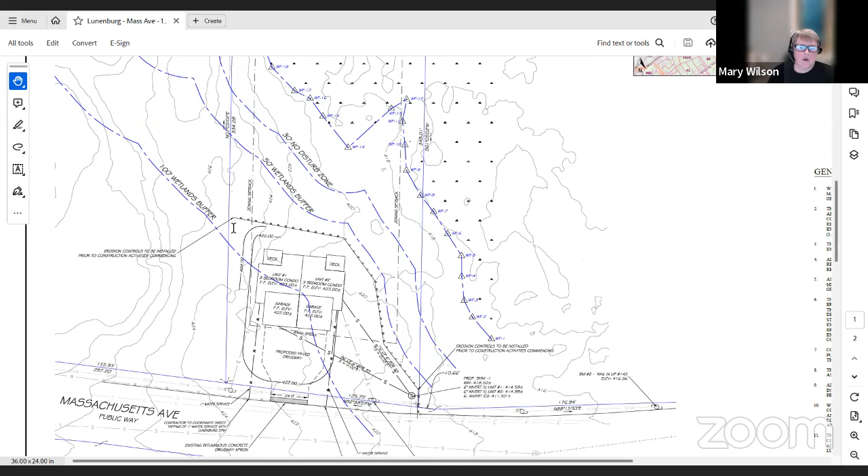Do I have questions or comments from other members of the commission? Okay, I'm not seeing any hands. Do we have any questions or comments from members of the public? And if people are struggling to find the raise your hand icon, you can always just unmute and let me know you have a comment, and I'll call on you. Okay, I'm not seeing any hands, and nobody's speaking up, so I don't have any other questions or concerns there. I'm open to accepting motions from the commission.

Madam Chair, I'd make a motion to approve this project with a standard order of conditions, and make sure that we receive a plan annotating that the limit of work is at the erosion protection, the erosion protection is survey located in place prior to the tree clearing, and the 2 white oaks are marked on the plan. And the hedge going in at least within the 100-foot buffer is marked on the plan as well. Very good, Rich. Thank you.

Do I have a second? Second by Jeff. Thank you, Jeff. Roll call vote. Chris, aye. Rich, aye. Jenny, aye. Jeff, aye. And I for myself.

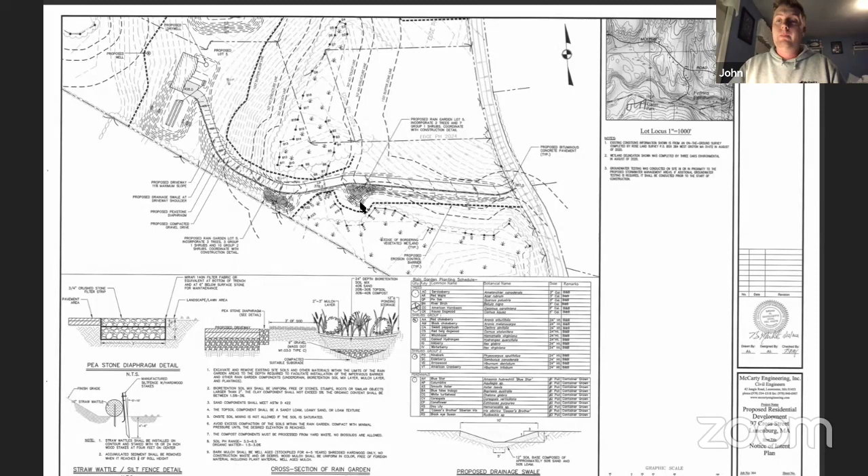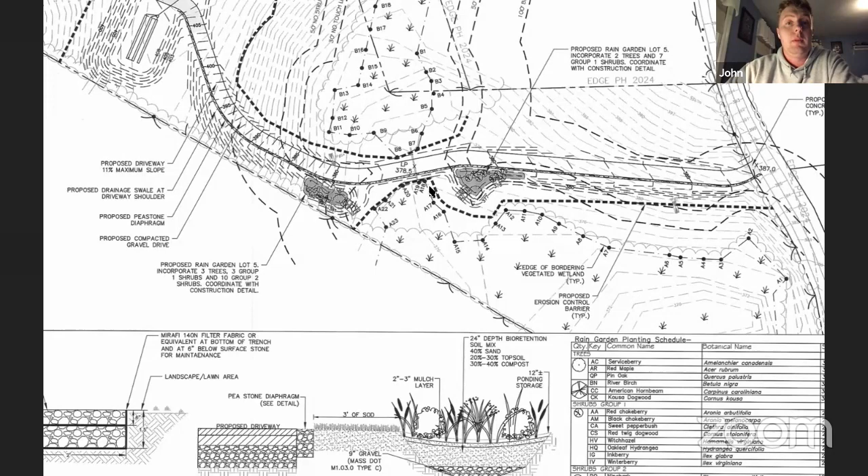Could you zoom in a little bit on this? So yeah, just kind of walk us through the driveway area and whatnot. Absolutely. So the only work in the buffer zone is the driveway itself. And you can see these shaded areas here, those are the rain gardens. And because of Lunenburg's local stormwater bylaw, we had to locate them here, and they're located within the 30-foot no touch. So we are requesting a waiver for that, but it's just a driveway to a single family residence.

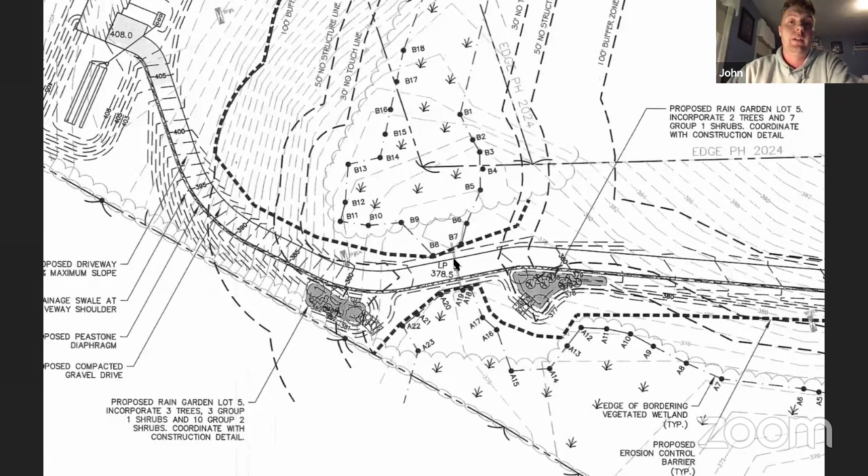This was previously a part of a 5-lot subdivision. This is the last lot. And the developer was trying to proceed with this last lot and discovered that his order of conditions had expired, and that's why we're here in front of you tonight. And so you're not actually having to do any fill into the wetland? No wetland fill. There's an existing culvert that we plan on utilizing here that connects the 2 wetland systems. This was originally a piece of farmland, so I think a farmer created that a while back. So no wetland fill. This is buffer work only.

Okay, I was reading the DEP comments. Sophie, have you had an opportunity to go out there, and do you have recommendations for us? Yeah, I was out there a little while ago. And the flags, are the flags still in there and in good condition? I did not recognize or pay attention to any flagging. There were no stakes or anything like that.

Sorry, I don't mean to cut you off, Sophie, but the erosion control barrier has been in for a couple of years now. So that's been put in place. I know Sophie mentioned she'd like to see a couple of spots replaced just because it deteriorated over time. But when we were on site, maybe about a month ago, erosion control barriers were in, and we actually did have the center line of the driveway staked out. So we didn't necessarily inspect flags, but you could really see the scope of the work that we're proposing.

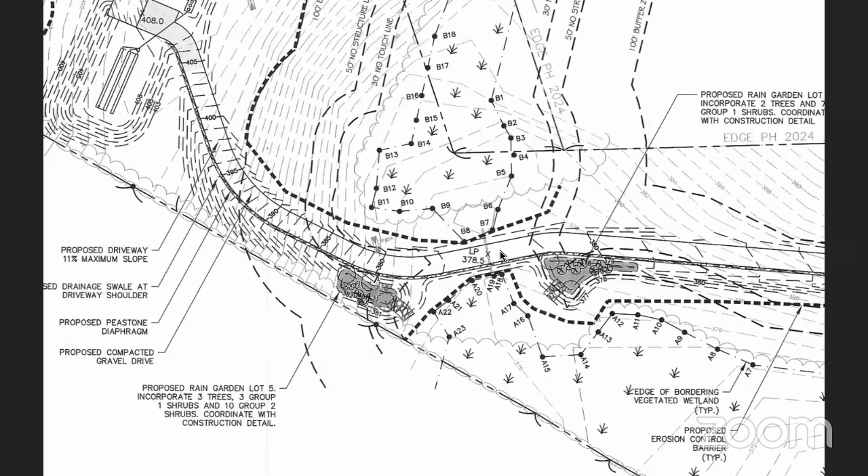Everybody's being shy tonight. Jeff, yes. Yeah, I think just a standard order of conditions with the limit of work to be the erosion control barrier. I can't see anything else that we would place on this personally. Okay. Thank you, Jeff.

Do we have any comments from members of the public? I'm not seeing any comments from members of the public. So I think I'm looking for a motion here. I'll make a motion, standard order of conditions, limit of work to be the erosion control. That's Jeff.

And Jeff, would it be acceptable within that we wait on issuing this NOI until our office gets a copy of the NHESP letter? Yes, that would be, we could add that. Sure. Thank you. Second. Thank you, Chris. Roll call vote. Jenny, aye. Rich, aye. Jeff, aye. Chris, aye.

And I for myself. Excuse me, Madam Chair, if I could just interject, before we close the public hearing, can we just clarify that the correspondence is not a letter from them per se, it's an email. I hope that's fine. Yeah, I think that's acceptable. Okay, all right, not a problem. I just wasn't sure if you were anticipating a letter. No, correspondence, okay, very good. I just want to make certain that we have something from them saying that they agree you can proceed. Okay, absolutely. Thank you. We'll move along.

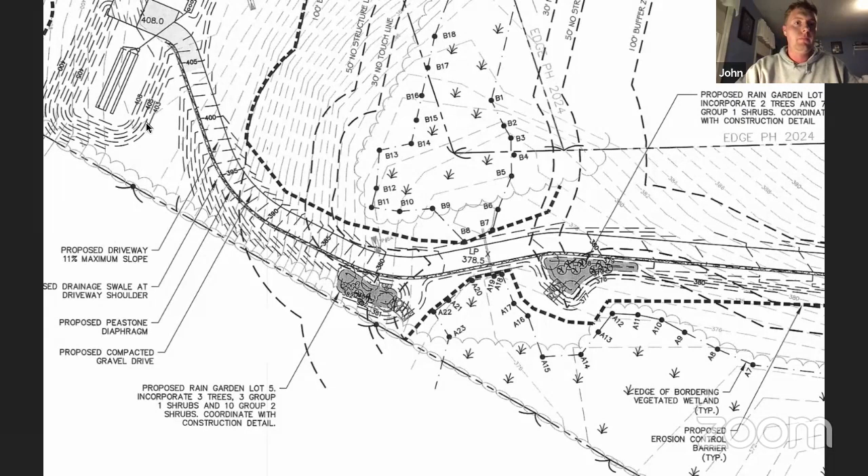Pursuant to Mass General Law, Chapter 131, Section 40 as amended, and the Town of Lunenburg Wetlands Protection and Municipal Bylaws, a public hearing for a notice of intent for the reconstruction of an existing rock revetment and landscape changes on the shore of Hickory Hills Lake at 154 Peninsula Drive. Do we have the applicant and or the representative here tonight? Madam Chair, Ryan Proctor with Dillis and Roy, representing the applicant. Hi, Ryan. Hello, how are you? Why don't you share your plans and give us an overview of the project? Absolutely. Let me just pull up the plan.

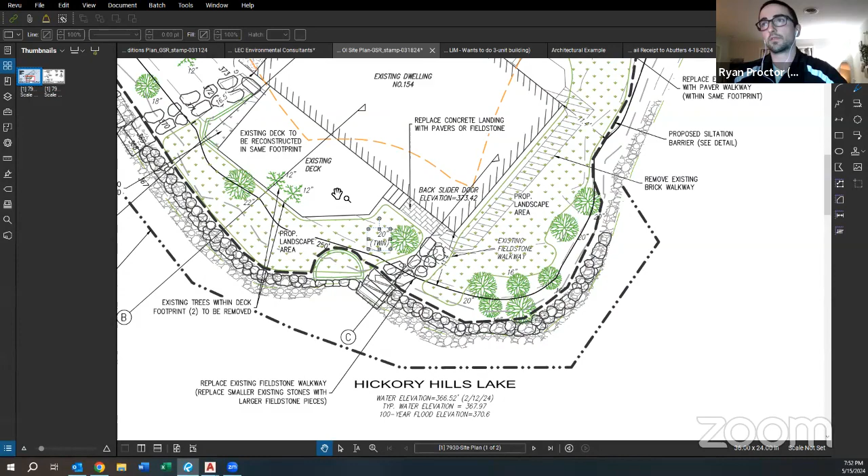But the total area is going to be the same there? Total area would be the same. The field stones would be separated, so there'd be a pretty significant void ratio between those pavers, just to help with infiltration in that area.

The existing deck on the side of the house is proposed to be reconstructed in the same footprint. It's currently timber, and it's showing some signs of failure, especially on the outside. So we're proposing to replace that within the same footprint. That'll be a standard deck. It'll be composite, but it'll have spacers in between so that there will be some infiltration of stormwater through the deck.

Along this frontage, we are proposing again to restore the existing land cover with a mixture of shrubs and perennials. And the deck currently has two 12-inch maple trees that are actually growing up through the decking. We are proposing to remove those, and those would be replaced because they're within the 30, consistent with your bylaw. There would be a total of 4 replacements for those trees.

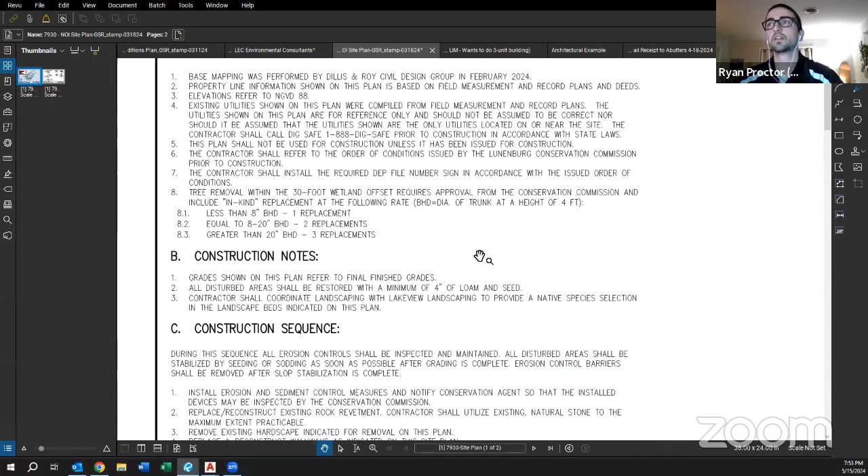And I do have a note on our site plan relative to that. So note 8 here is right out of your regulations. So there are two 12-inch trees. They require 2 replacements each. And those would be located in the 30 and part of the overall comprehensive landscape plan that Lakeview would put together.

The last thing on the left side of the house, there is currently another brick walkway that leads off a second portion of the deck and down to a seasonal dock. We are proposing to memorialize that walkway with fieldstones similar to what we've done here below. And that would lead down to an existing landing area near the seasonal dock.

The second portion of the project is along the shoreline. So the applicant is proposing to reconstruct the revetment along approximately 125 linear feet of shoreline. Basically, that would pull back the revetment such that it's recessed into the slope. We'd be holding the upper bank elevation and then creating a dry stacked vertical retaining wall with a filter fabric behind to prevent some migration of sediment that's currently happening now and washing out into the water.

We would have erosion protection on the top of that wall, as well as a poly barrier in the water to prevent any migration of sediment down into the lake. Since these shoreline improvements exceed the 50 linear feet along the shoreline, the Wetland Protection Act requires us to do a wildlife habitat evaluation. So the applicant did contact Dan Wells of LEC Environmental to perform that evaluation, and I did submit a copy of that to your commission with all of our materials. It's a little over 40 pages.

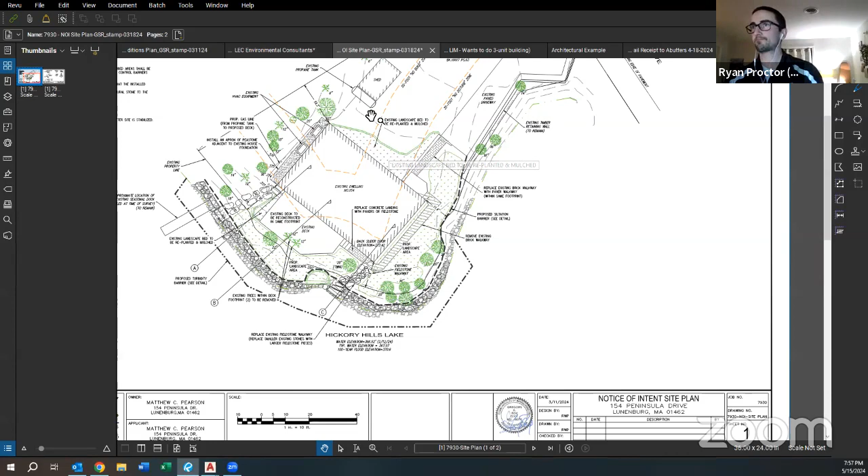Did you say where the replacement trees were going to go? I did not. That was going to be worked out with Lakeview. We do have some spots along the east side of the house that I think would be appropriate. They would definitely be within the 30. That's where all the landscape improvements are happening. I don't have specific locations for them at this time.

Okay, and so I take it that we don't have the landscape proposal from Lakeview? Not specifically. Mark just mentioned that all the species he'd be picking would be consistent with other projects in town. They would be native, like other lakeshore projects he's done on the lakes here.

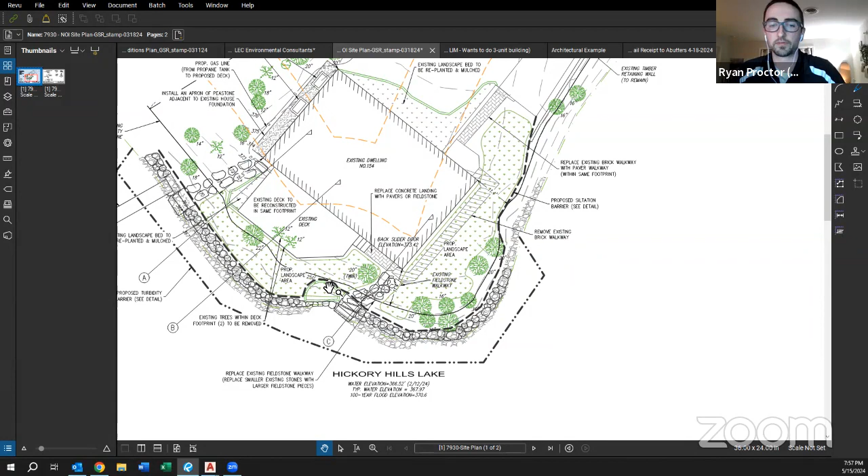Rich. Madam Chair, as the applicant is working with my brother, I'm going to recuse myself from this hearing. Thank you, Rich.

Jeff. Yeah, Madam Chair, just a question or a comment more. With lake levels rising fast on lakes, it seems that some of these projects are being started in the fall and the lake rises and they're in the water. I think we really need to start to put some restrictions on lake level and maybe like a weekly report of the water levels while projects like this are occurring, just for our records.

Where would we get that information from? Is there some automated way to get it? Well, even just from a contractor, just to say the lake's at an operationally feasible level to proceed with the project currently, if we can just get a weekly report. Because just for example, this year, I know Lake Shirley and Hickory Hills were pretty much filled to capacity the first week in January, which is kind of the time that a lot of these projects occur. And this is a fairly extensive one. I would assume it would take close to a month.

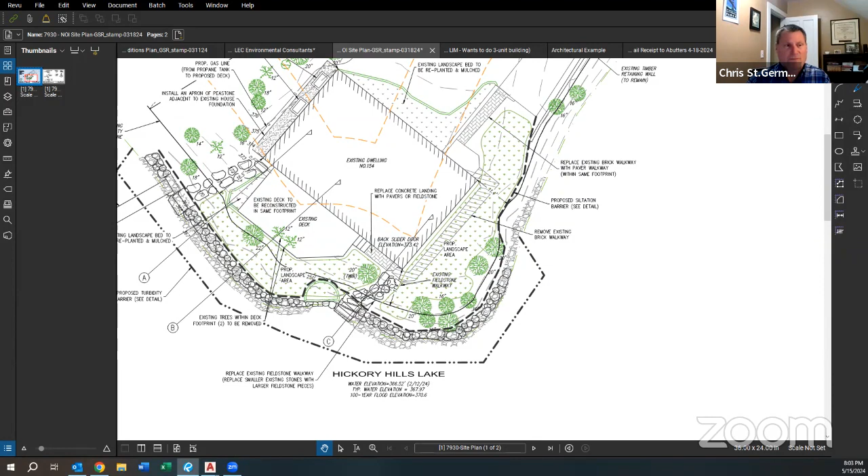Do we have any motions? So moved. So Chris, you're okay with those conditions that I recommended? Yes. Okay. Do we have a second? Second. Okay, thank you, Jenny. So we'll go for a roll call vote.

Chris St. Germain, aye. Jeff Viviano, aye. Rich Bursch has recused himself. Jenny, aye. And aye for myself. I appreciate it and have a good night. Thank you, Ryan. Thank you.

Pursuant to Mass General Law, Chapter 131, Section 40, as amended, and the Town of Lunenburg Wetlands Protection and Municipal Bylaws, a public hearing for a notice of intent by Timothy K. Gendron and the Revocable Trust. The project proposal is for construction of a residence duplex, associated driveway, and drainage features. The location is within the edges of bordering vegetated wetland and buffer of an intermittent stream at Lot 2 Cross Road, Parcel 99-11.

And do we have the applicant and or their representatives here tonight? Yes, ma'am. You have Chris Anderson with Hannigan Engineering. Okay, Chris, you want to give us an overview of the project? Sure. Yep. So if I could just share my screen real quick, I can pull up the plan. Please do.

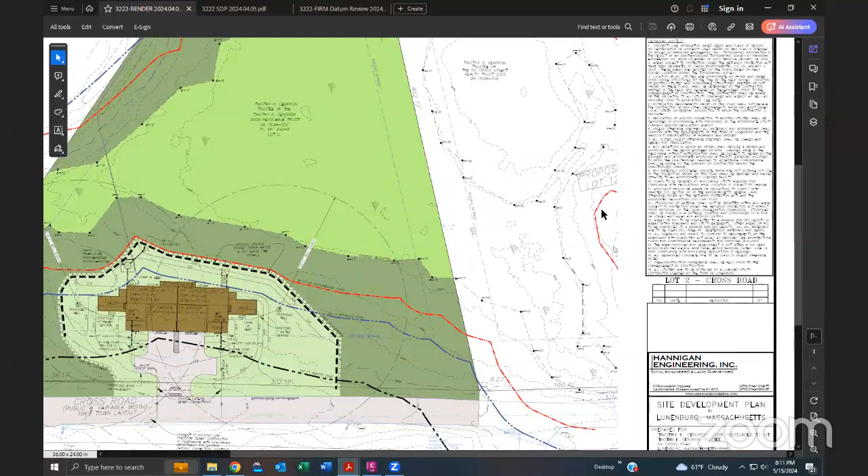And I'm looking at your plan. Where you have erosion control, you have a note that that's the limit of clearing. So it doesn't say it's a limit of work. Is there a note here about the limit of work? It was the intent that that would be it, but we can add additional notations on the plan, clearly memorializing that the erosion control line is the limit of clearing and limit of disturbance in perpetuity. And am I understanding too that the proposal is to cut all of the trees contained within the limit of clearing? It is the intent to do that at this point in time. Okay.

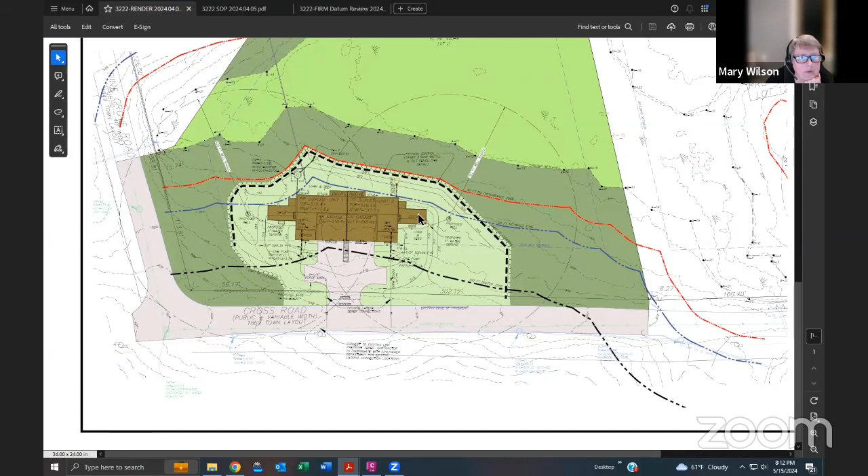Sophie, what are your recommendations? Well, first, if you don't mind, I have some clarifying questions. Sure. Quite a few actually. So I reviewed the FIRM datum letter on the bordering land subject to flooding, and I want to ask. It states that there isn't any located on the property, based on the NAVD 88 datum for 512.90 feet in elevation, but I was looking at the plan pretty extensively, and it appears to me, if I'm interpreting it correctly, that the work would be done within the 512.90 to 506 foot elevation grade. And if I'm interpreting that right, that would be considered within the BLSF.

So through the chair, if you don't mind. Yes, Chris, please respond. So it is correct that the elevations of the actual site themselves would be, quote unquote, below the 512.9 number, if you will. But what happens is when you look at the topographic information along Lake Whalom itself, there's a naturally occurring berm that sits around the 513 to 514 mark along the entire perimeter of the pond. So that creates a physical barrier from floodwater from Lake Whalom entering into this area of the site.

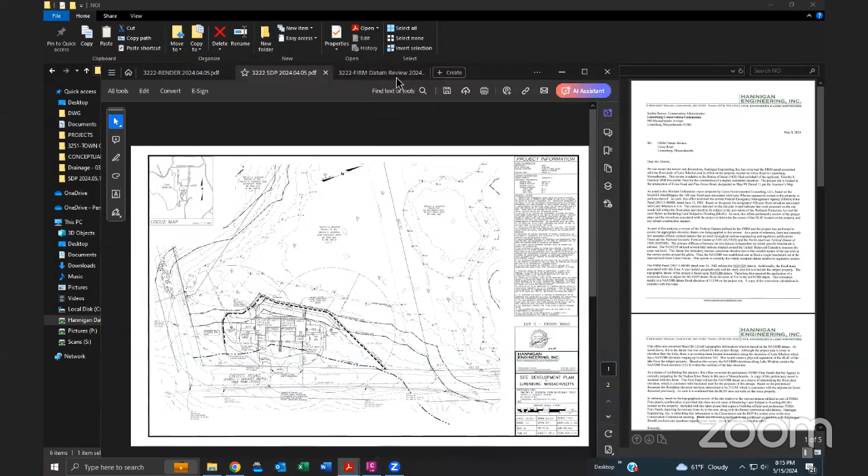So as a quote unquote gut check, we looked at the preliminary FEMA FIRM panels that are currently being reviewed and hopefully will be issued in the coming months. But effectively what that does is it re-reviews the floodplain within these areas. Obviously, this is preliminary and still has to go through the vetting process. But FEMA, when they do finally issue these documents, limits the Zone A to the 512.9, which coincided with our calculation for the datum shift.

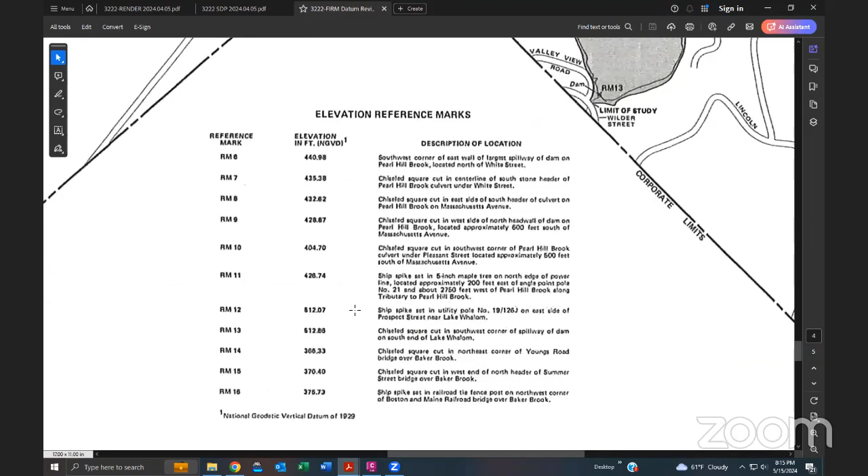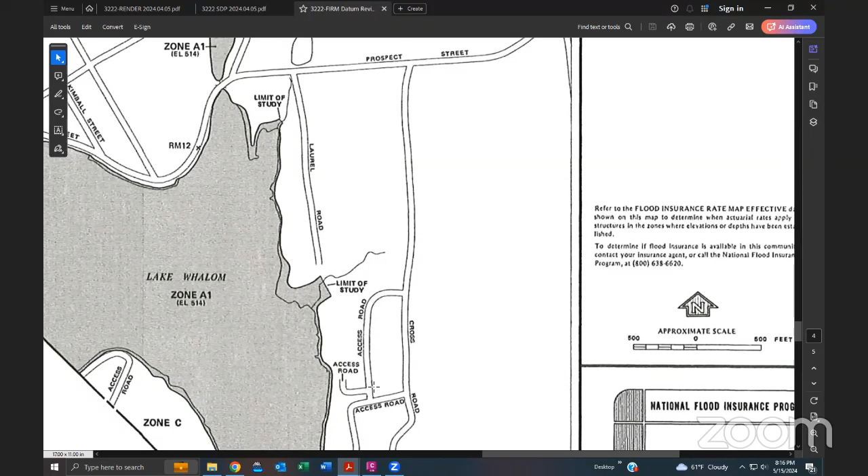And when you look at the actual current legal FIRM panel, back when they first created this FEMA FIRM, they effectively said, we don't want to study any further, and this is the limit of the study. So that put the burden on us to do the analysis that we did perform, and that's how we came up with the determination that the lake's berm in that area of the limited study contains the floodplain within the lake itself. Chris, where is that berm approximately on the drawing that you're showing us?

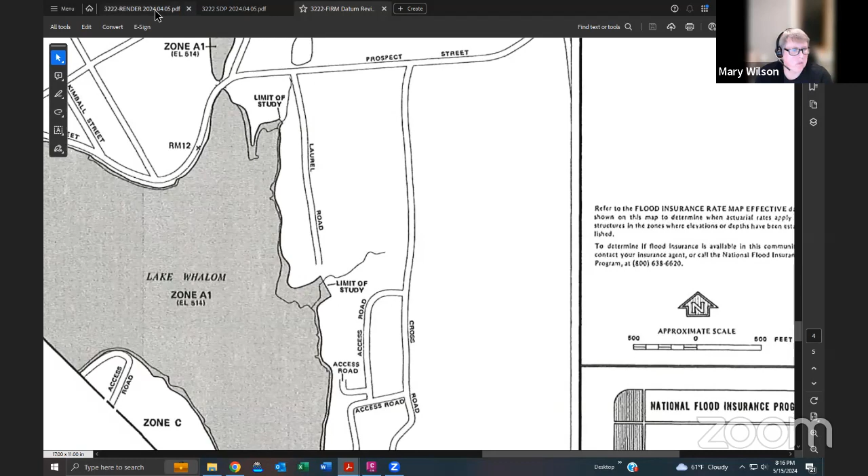So it is located well off the property. If you look at our locus plan, here's the locus, the property that's in question. That berm is actually located through here. And we used LiDAR information of the area to determine where that berm elevation is and where it's located. Okay, thank you, Chris. Sophie, back to you. Yep.

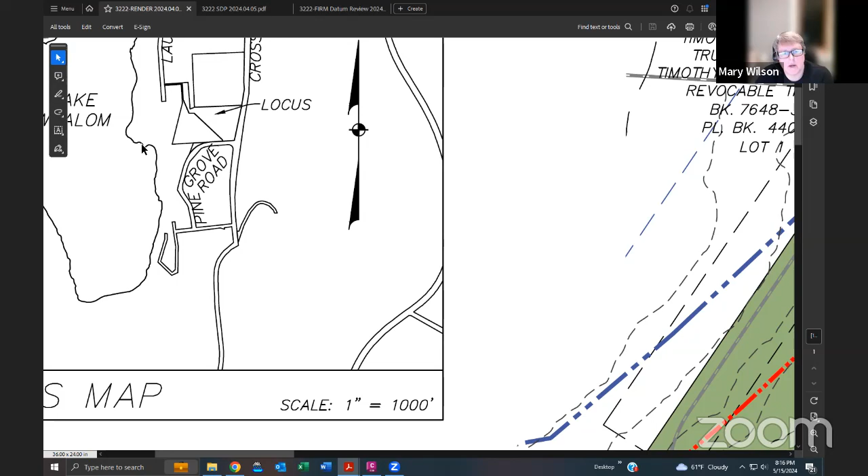Okay, Mary, you asked the next question that I had on location of the berm. So from my understanding, that would possibly stop the water from coming in that direction. But since the wetland has about 3 hydrologic connections, one of which goes directly into flowing out of Lake Whalom, would that pose any sort of changes in the water level there?

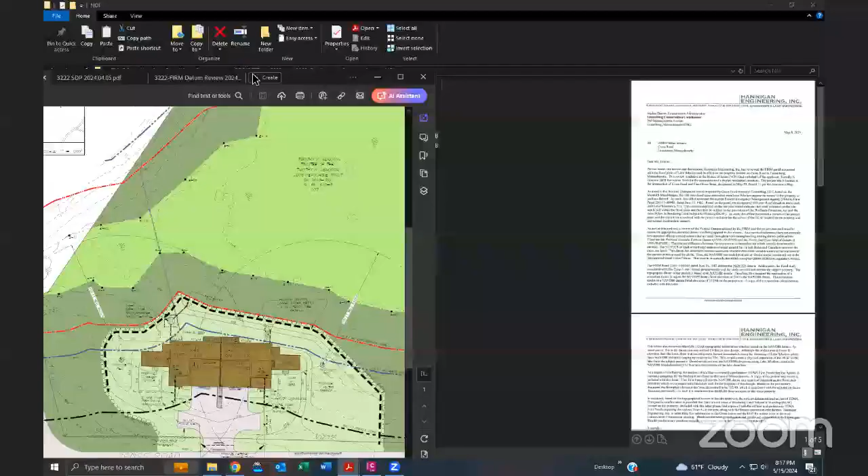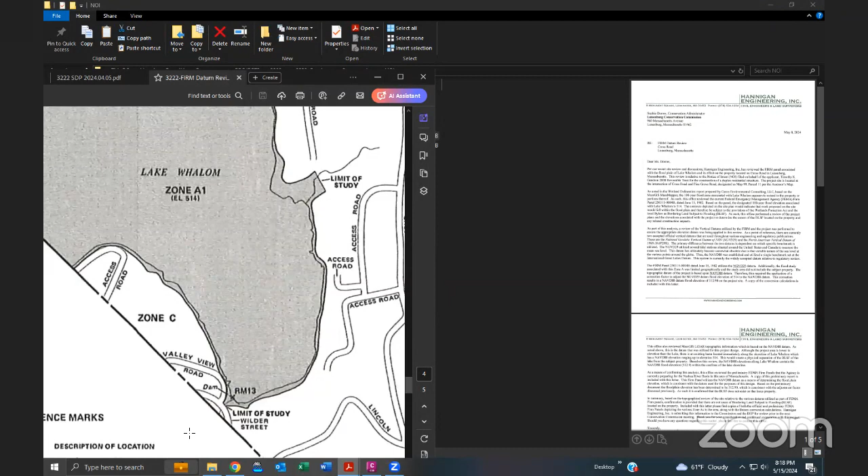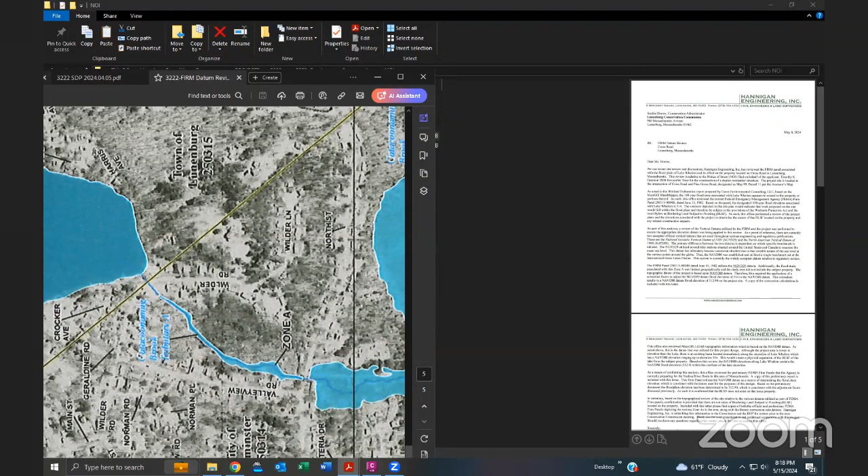So my understanding is that Lake Whalom discharges down near Valley View Road and Wilder Street. So the water generally flows from the northerly portion of the site, through Lake Whalom and out through that dam structure where it says RM13. And when we look at the preliminary FEMA FIRM, it reflects a similar path of water flow. Okay. Sophie, any other questions?

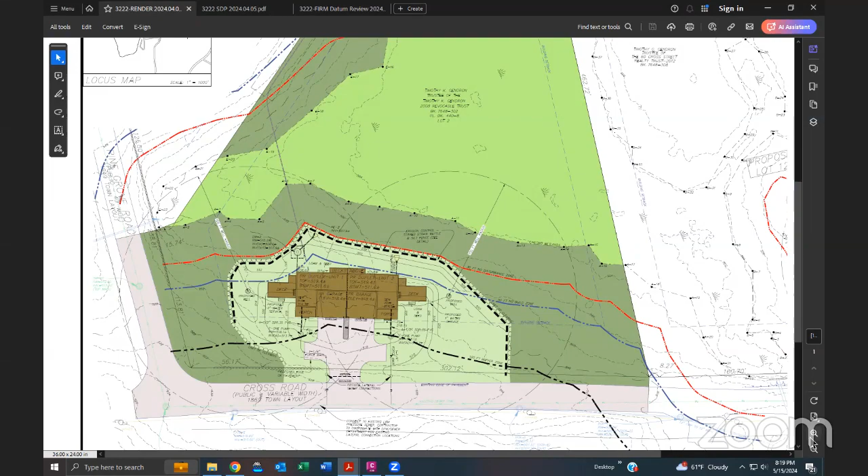Hey, yes, actually, there were 2, it looks like foundation drains, it's kind of small, on the north or backside of the proposed building. Yep, foundation drain. And the other structure off to the left, it's a box with the round depiction there. Are there any alternative locations for them? Can they be moved closer to the 50-foot no build, since they are a structure and could possibly be impervious surface? We don't have a detail on that either.

So the foundation drain is dictated exclusively by how to get the water away from the footing of the foundation. So that one's kind of stuck. All it is is a perforated pipe around the footing of the foundation that discharges groundwater. If it does ever reach that point, getting it away from the site is dictated by gravity.

The dry well and the other structure right here is considered the dry well system for the roof drainage. The intent and purpose of putting the dry well in this location was so that we could capture and disconnect the impervious area from the roof from directly discharging into the jurisdictional areas. So that one's also dictated by topography and hydrology in order to get that disconnect to occur. Otherwise, it would have to be piped all around the building in order to get it away from that area.

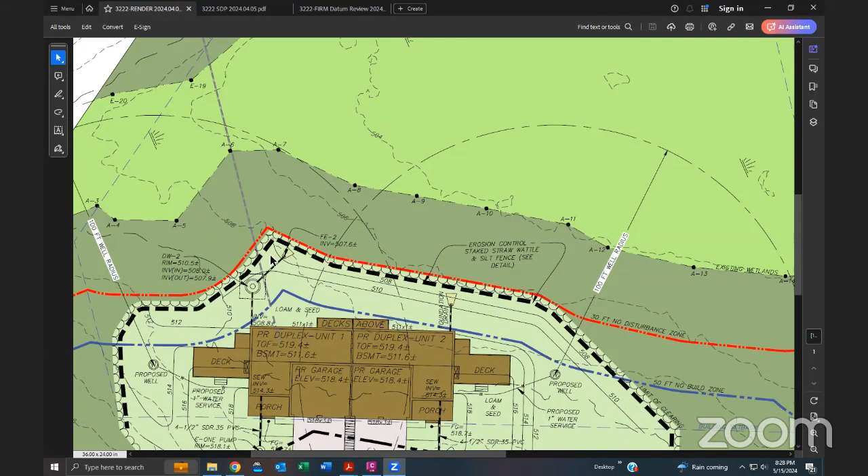Okay. Yeah, I guess my concern was with the delineation itself. Just in looking at it quickly, flags 6, 7 and 8 don't seem to be following the far side of the wetland as far as the elevation. On the far side, they seem to be up at 506, E19, E18, E17. But then the corresponding A6, A7, A8 are below the 506 elevations. I was just questioning. I might try to get out there this week and take a look, since we can't close it anyways. But I wasn't sure if Sophie had checked on the delineation.

Sophie, can you respond to Rich's question as well? I think you had your hand up. Yeah, I just wanted to echo Jenny's, and I wanted to say that yes, I do believe that the majority of that site that I was walking around did seem a lot tighter between the buffer and the actual roadside itself. And I do think the delineation is questionable. So I would definitely back myself and other commissioners going out there again to have a closer look at the flagging. Because the whole site for me is concerning.

Through the chair, if it makes sense, I can reach out to Chuck Caron with Caron Environmental. He did the delineation on the site. I think it might make sense to have Chuck, any of the commission members who want to be on site at the time, and Sophie, and have him walk through the delineation line and show how it was determined. That way there's no question of why the line is doing what the line is doing, if you will. Yeah, I think that's a great idea.

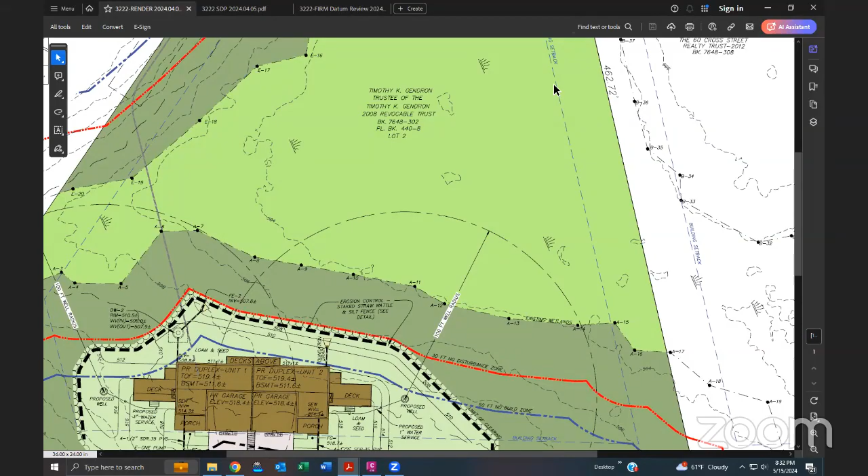Okay. So I'm looking for a motion by the commission to continue to June 5th. So moved, Rich. Second, Chris. Great, thank you. Roll call vote. Jenny, aye. Jeff, aye. Rich, aye. Chris, aye. And I for myself, continuing to June 5th.

Okay, moving along. Pursuant to Mass General Law, Chapter 131, Section 40 as amended, and the Town of Lunenburg Wetlands Protection and Municipal Bylaws, a public hearing for a request for determination for PJ Keating Company. The project proposal is for replacement and maintenance work connected to the existing pump house. The location is within 100 feet of a bordering vegetated wetland and priority habitat number 1738, related to 495 Leominster Shirley Road. Do we have a representative from the Keating Company here tonight? Yes, we have a couple. I'm Jacob Bremer, Assistant Environmental Compliance Manager at PJ Keating. And we also have Cody Delaney and Rob Pagan.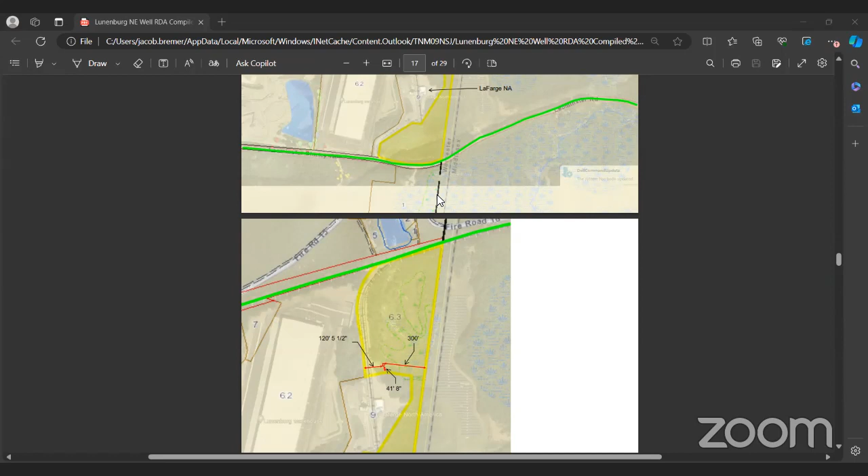A quick description of the work: PJ Keating Company proposes to excavate a 4-foot deep footing, 42.5 feet in length, to create a 12 by 18-foot foundation. We will be pouring a concrete slab, 12 feet in width, 18.5 feet in length, and 6 inches deep inside that excavation, and erecting a wood shed on top of the slab. This project represents a replacement of an existing well. The replacement well has been approved by Mass DEP, and I will show you a quick plan.

So here, this brown rectangle is the existing well. So we would like to just extend, create a new lean-to right next to it. This wetland area, I believe it's actually fenced off or not easy to access, but we will be going nowhere near it, just in this general area. And the access road to it kind of comes up along on the far side of the wetland.

Oh, and I'll scroll down and show some photos that we have of the wetland. I believe they're in here. That might not be. Okay. Maybe I went too far.

One other thing that we wanted to bring up was to identify provisions of the Wetland Protection Act or regulations which may exempt the applicant from having to file a notice of intent for all or part of the described work. So, per the Massachusetts Wetlands Protection Act, we request that the commission consider the following: 310 CMR 10.02.2A2, activities conducted to maintain, repair, or replace, but not substantially change or enlarge an existing and lawfully located structure or facility used in the service of the public and used to provide electric, gas, water, sewer, telephone, telegraph, and other communication services, provided said work utilizes the best practical measures to avoid or minimize impacts to wetland resource areas outside the footprint of said structure or facility.

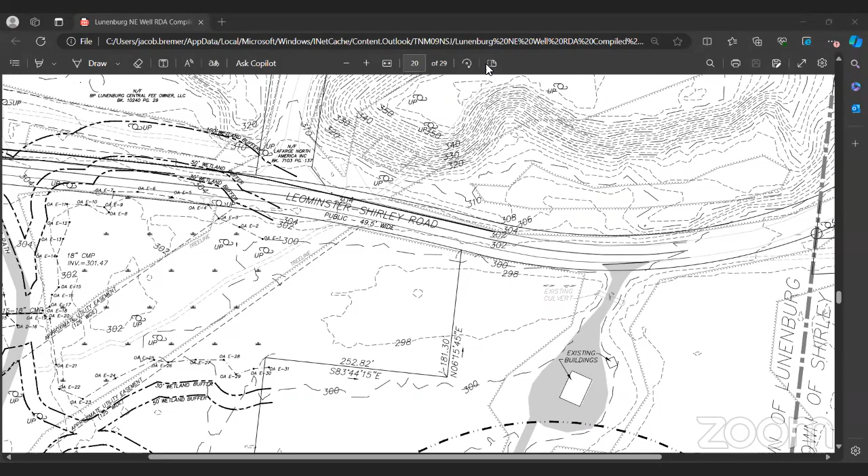Oh yeah, no problem. So like I said before, I'm gonna stop sharing my screen now. We do have DEP approval already. And we are looking for the commission's approval, I believe. It's an RDA. What do you have DEP approval for? It's typically only the NOIs, is what I'm familiar with, getting DEP approval.

Cody, you have your hand raised? Excuse me, I just haven't lowered it yet. Sorry about that. Oh, yeah, okay, no issues. A lot of times I lower them for people too, but not quite on my game tonight, but that's okay.

To answer your question, we have DEP approval to replace the well. Okay. On the well replacement. Okay, and again, you're increasing the cement pad there by how much? I was just scanning through your application to see if that was clear to me. Yes, we'll be pouring a concrete slab, 12 feet in width, 18.5 feet in length, and 6 inches deep.

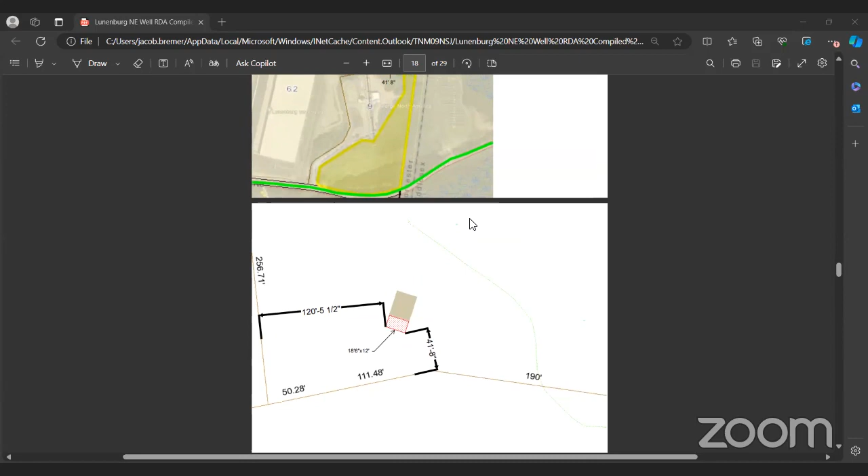Okay, yeah, I can see that green. I can see that on your screen, but I don't actually see that in the submittal. I see something similar in the submittal, but I don't see that unless I'm overlooking it. I think it didn't print very well. I'm looking at this printed submittal too. You can't see the line at all. I see what you mean.

So I think I would like to see, as Rich was pointing out, where the wetland is relative to the work that's being done, and the dimensioning on there so that we know exactly what is where relative to the wetland, and a thick line so that we can see it. And Rich, it was your turn to speak, so I'll go back to you.

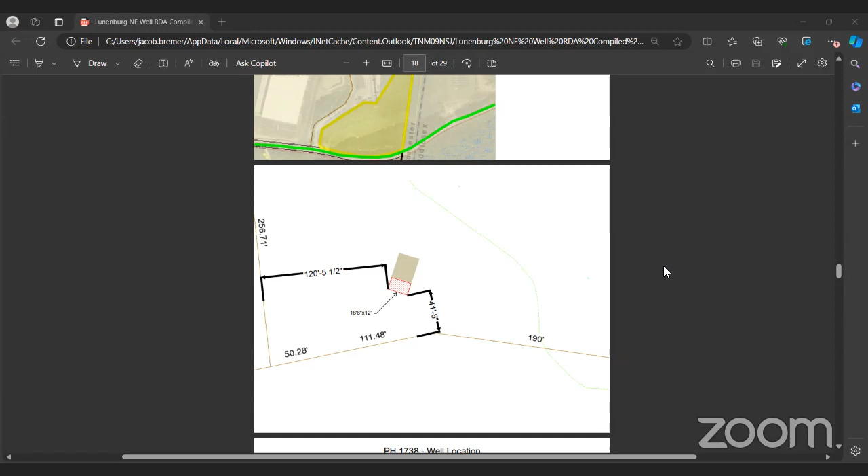Yeah, unfortunately, at this point, without having an actual site plan of where we are in relationship to the wetlands and access roads and things like that, I'm not prepared to make any more decisions on whether we need an RDA or an NOI. Well, I pointed out earlier that the access road begins here and comes along here and sticks to the left side. We can't see that in the drawing. I mean, it's not apparent to me in the drawing anyway.

Yeah, and unfortunately, there's no erosion protection. Unfortunately, it's an incomplete application at this point, even for an NOI or an RDA. So if they would come back with a drawing that actually shows where the existing structures are, where the new structure would be, the dimensions from the wetland line, and including the access road, would that put us on a plan to make a determination? Is there anything else that you would be looking for? I mean, just the standard information that we ask for in an RDA, you know.

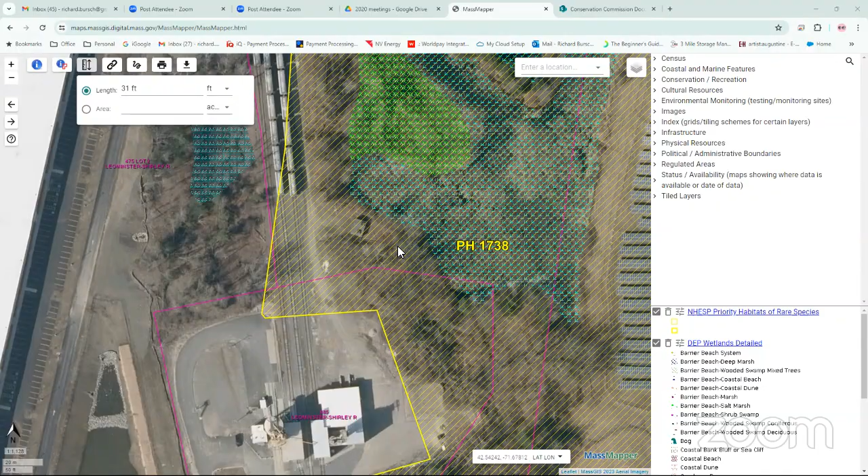Okay, so I think I'm looking for a motion to continue this to the next meeting, which is June 5th. So moved. Rich Bird. Thank you, Rich. Second. Second, thank you, Jenny. Roll call vote. Jeff? Aye. Jenny, aye. Rich? All right. Chris? Aye. And aye for myself. Thank you, gentlemen. Thank you very much. Thank you.

We will move along. Okay, so Howard Street is the next one on the agenda. We already cleared that through a continuation request. The following one is 255 Sunny Hill Road. And I guess I'm gonna read the whole script. Pursuant to Mass General Law, Chapter 131, section 40 as amended, and the town of Lunenburg Wetlands Protection and Municipal Bylaws. A public hearing on a notice of intent by Stephanie McSweeney for the construction of a single-family home and associated site work at 255 Sunny Hill Road, DEP number 2081320.

Do we have Mr. McSweeney or his representative on the call here tonight? Yep, John Plifka again here from McCarty Engineering. Hi, John. Yeah, so I think if I recall correctly, you are back because in our last deliberation and determination for the third party wetlands review, we kind of got the name of the consultant firm and the cost misaligned. Is that right? Yeah, sorry, I didn't mean to cut you off. That is correct. We had the right dollar amount, but the wrong company.

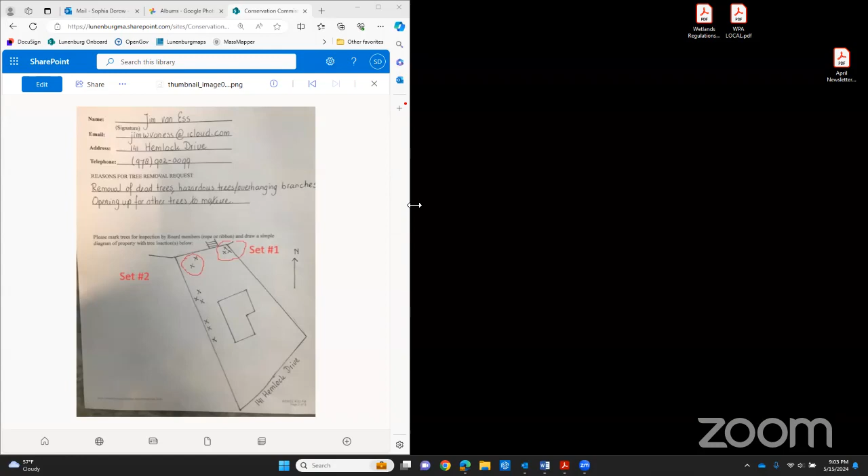I know it looks kind of wonky with a million different tabs and stuff, but this is reference to what the Hickory Hills Association has provided. Basically, the circles are showing the trees that were proposed for removal.

Please mark trees. No, Sophia, these were actually the ones that we left, remember? The circled ones were the ones that they came back to me at, and they say, yeah, leave these alone, which is what we did. Only on set number 1, we took off some of the branches. Remember that I showed you these? No, yes. Okay.

So in short, I believe the number of total removed trees were, I believe, 5. You can correct me if that sounds... Yeah, correct. That's about right. And the 2 biggest ones were the ones on the side of the house. These were the oak tree that was completely hollow on the inside, and then the one next to it was completely hanging over the house.

So the 3 stars that you see on the left side of the house, these actually were the ones that we did not remove. We just took some branches off that were hanging over the house, but they are still there. These 3, yes. And out of the other 3, 2 of these were taken down. One was the one that was completely hollow, an oak tree. And then there was another oak tree, the one most to the right side, that was hanging over the house completely, and that one was taken down.

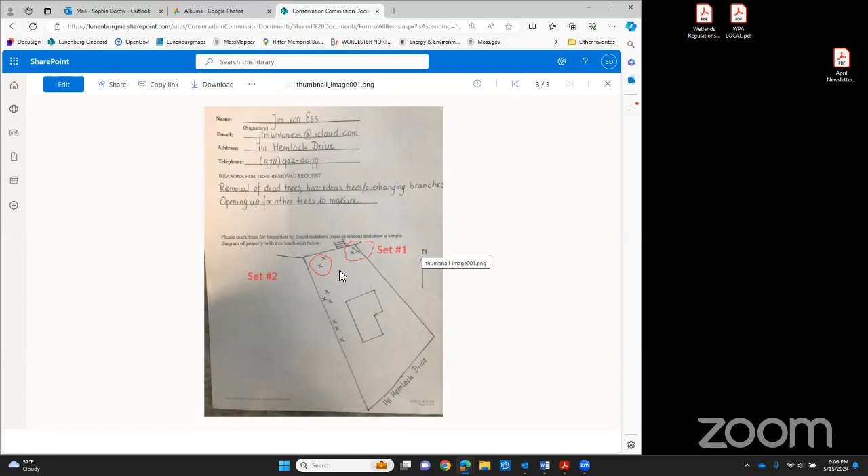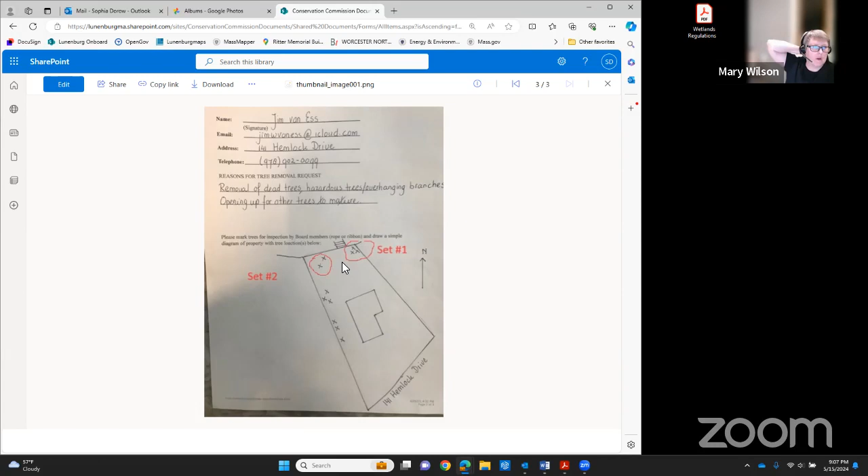Okay, thank you. Anything else you wanted to add, Sophie? No, I'll just back him up on, they do look pretty healthy for the time being as new saplings. Okay. Thank you, Sophie. Jenny, anything you wanted to add?

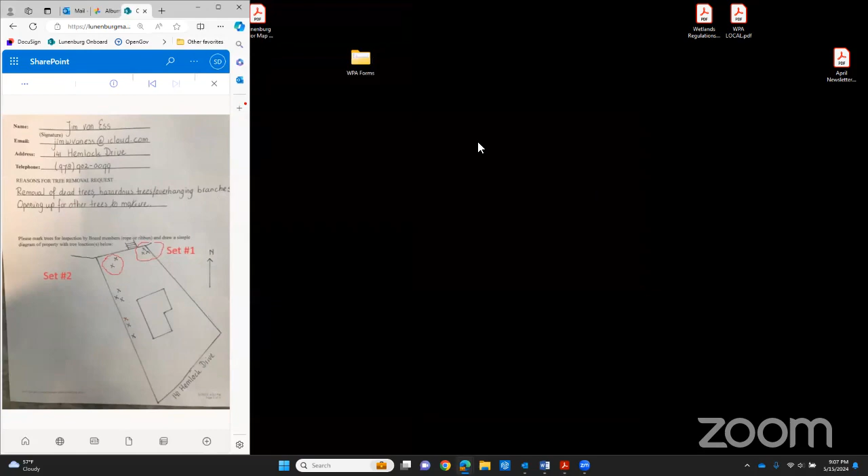So I was gonna agree with Sophie that the trees that he did take down looked diseased, and he did plant a significant amount of pines on the property. I did take some pictures of that, and I don't know if we want to see them or not. So I just agree with everything that Sophie said. I had the same observations while I was there. And then I also have some pictures of the steps that he's hoping to put in and the area where he is hoping to put them in. Okay, very good.

So then I think one question I had, did we have a COC on the previous homeowner's work? Homeowner builder? Sophie? So I looked in the Worcester Registry of Deeds, and there's no record of a certificate of compliance that I could find for the previous order. Okay.

That seems like something that we have to close out. Yeah, Sophia sent me some information about what the actual order of conditions is that is open. And it dates back to even before the house was built. Actually, the same engineering study that I kind of used for the plan that I submitted for the steps to go down, because it identifies what you can and cannot do.

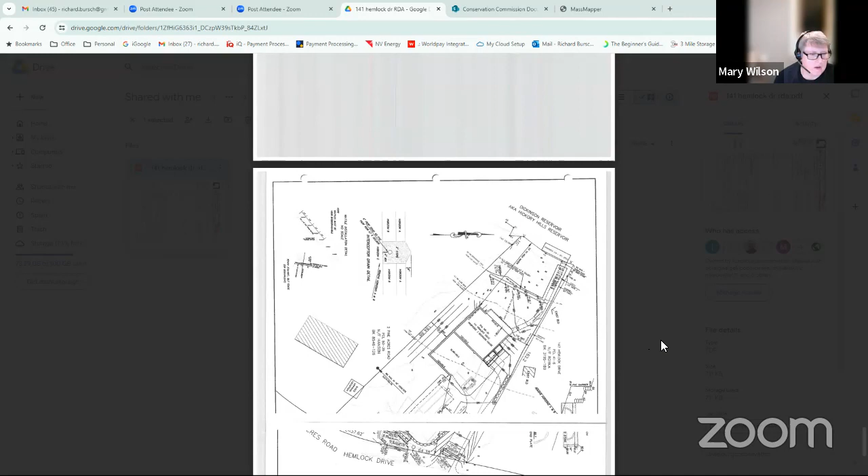Yeah, okay, so I see this plan was approved. If you zoom in on that area, those are the stairs, and there's actually approval for a 5 by 20 dock. So the only downfall is the order of conditions is expired. So he's still gonna have to file. But at least we have an exact plan of probably what he wants to do, and it's already been approved.

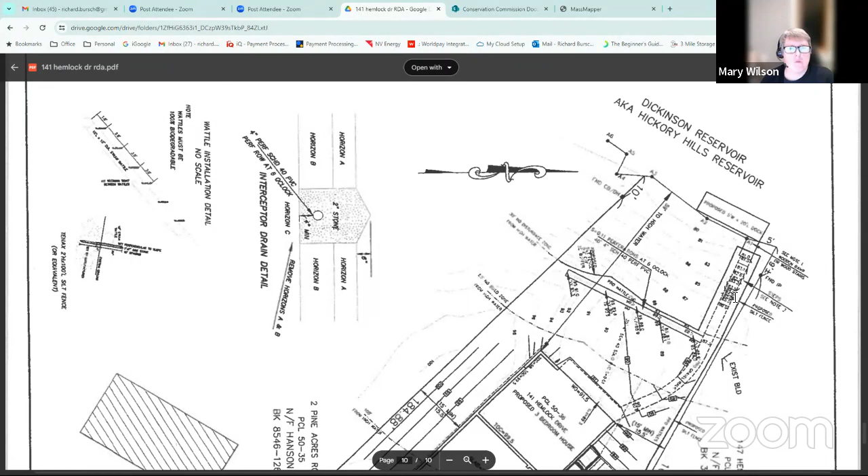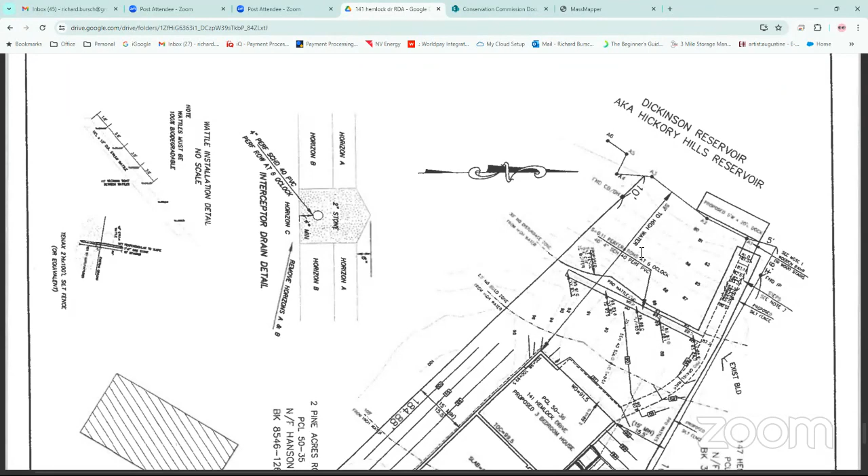And Jim, is this consistent with what you were proposing? Yeah, so is this now what I did propose, or was this already proposed before this? This was already proposed. This was with the house build. Yeah, and that's exactly the paperwork that I submitted, right? Yeah, I think this was the RDA that was submitted. Does it have a date on there or not? Because I got the old paperwork saying September the 17th.

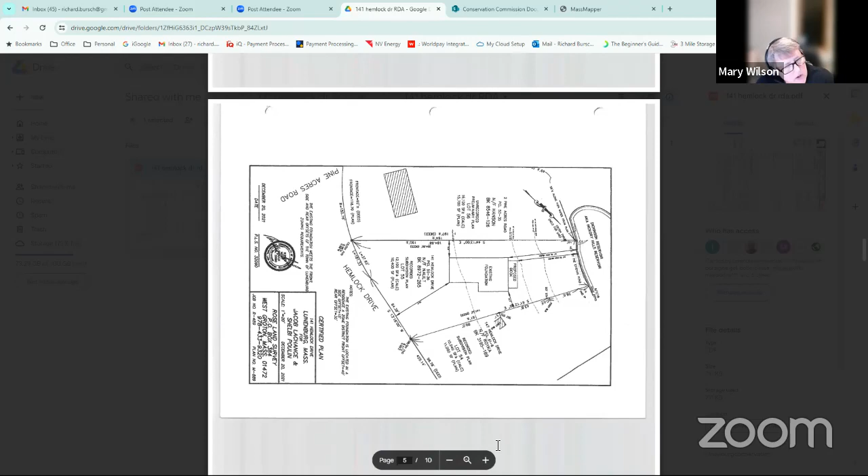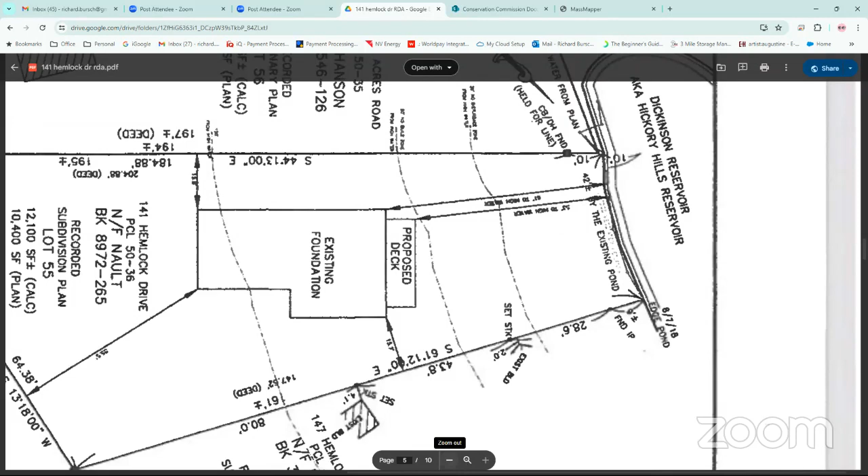Oh, yeah, this is the RDA. I'm sorry, I misunderstood what was being shared. This is the RDA. This is what I submitted, I believe. Yeah, okay, it said 2024. Yeah, and it gives a description of what we were doing there. Unfortunately, I can't rotate it. I don't know how to rotate. You have to download it first and then rotate it. Okay.

Jenny, did you have a comment? So, we're all looking sideways. An email request, yep, open that. Is it July 28th of 2021, asking for a 3-year extension on the order of conditions. I can't figure out if they got it or not, though. The request was July 28th, 2021, if you're looking in the Google Drive. So if they did get it, it would be sometime after that date, which would put us after today's date. I just can't see if it actually had been approved or not.

Right. So can we maybe go through the description of what I submitted then? Yes, let's do that. If you can just scroll this page up a little bit, and then here it is. So that's the description of what we are planning to do. Laying natural bluestones and creating steps on the right side of the house. We have a pretty steep slope immediately on the right side of the house, followed by laying natural stones on a bed of crushed rocks in the 30-foot no disturb zone towards the water, to 5 feet from the high water mark. All in compliance as described in the site plan, the engineering plan that was made in 2018.

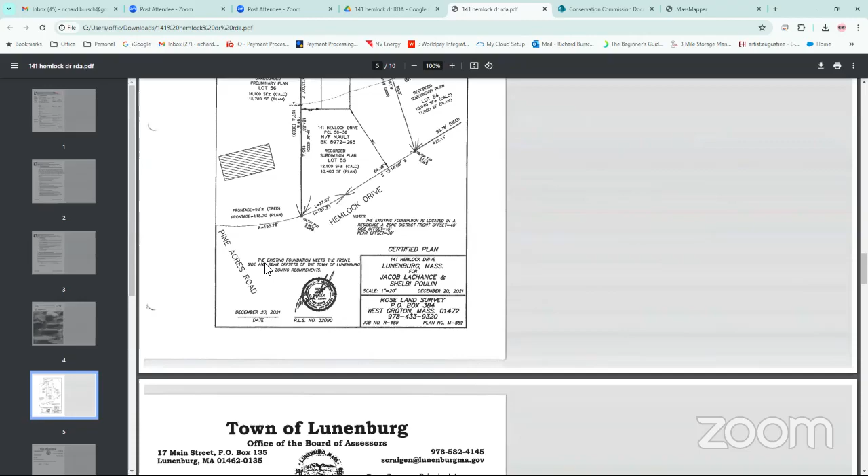Here it is. You see the verbiage on the right-hand side basically lists what you can and cannot do, and that's what we are planning to be in compliance with. So it's pretty straightforward. It's a steep slope down to the lake, and there's some erosion at the end of that, and we try to avoid that by putting crushed stones on it and then put the steps in. Thank you. Wouldn't you agree, Sophia and Jenny? I tried to explain it as good as I could. But...

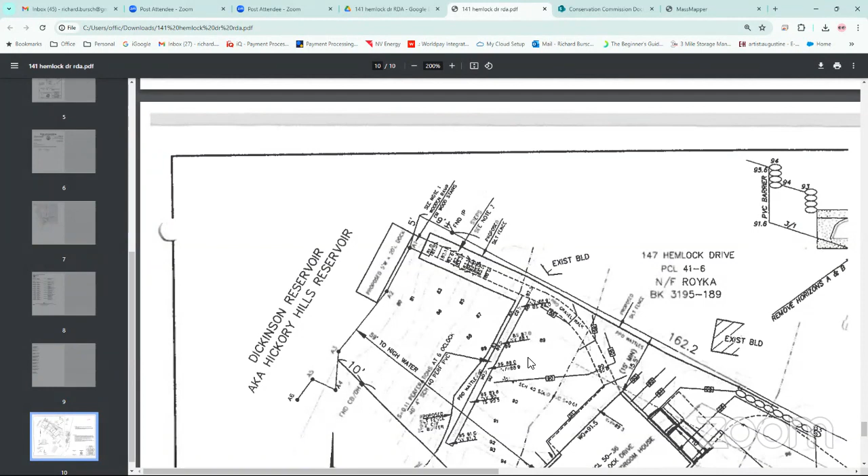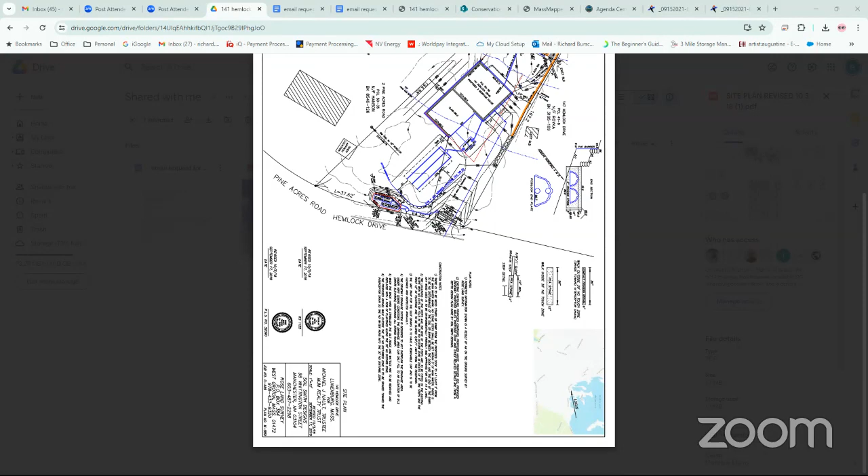And it does have the description of the pea stone steps going down. So the only thing you have to do is just put in like a silt fence area, because that seems like it's already gone. Yep. So this orange line, that's the silt fence, the erosion protection during construction. Okay, so we can have Sophie email you this. Yeah.

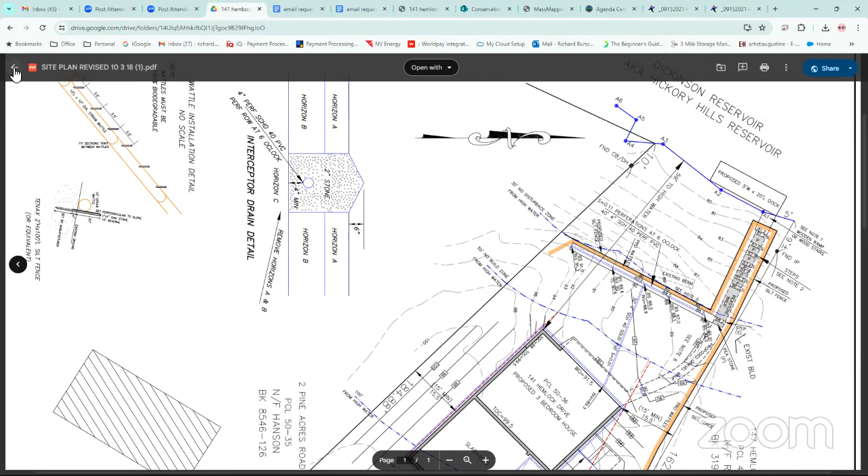So Sophie, it's on the drive in the October 20th, 2021 meeting folder. All right, I'm just gonna write that down because searching can be a nightmare. But what does that mean for the issue that's still open, or does this take care of that? Takes care of that. Oh, okay. So who would ever close that then? So when you're done, it will expire in October. Okay, so once you complete this project here with the steps this summer, just tell us you're done, we'll come out and review it and issue a certificate of compliance for the whole project.

Wonderful, great. And then I still have a question from way back when we had the discussions about the trees that I had taken down. There was an enforcement order issued at that point. Is that going to disappear as well? We are still tracking that on the enforcement list as well, the violations list. Yeah. So how do we get that off?